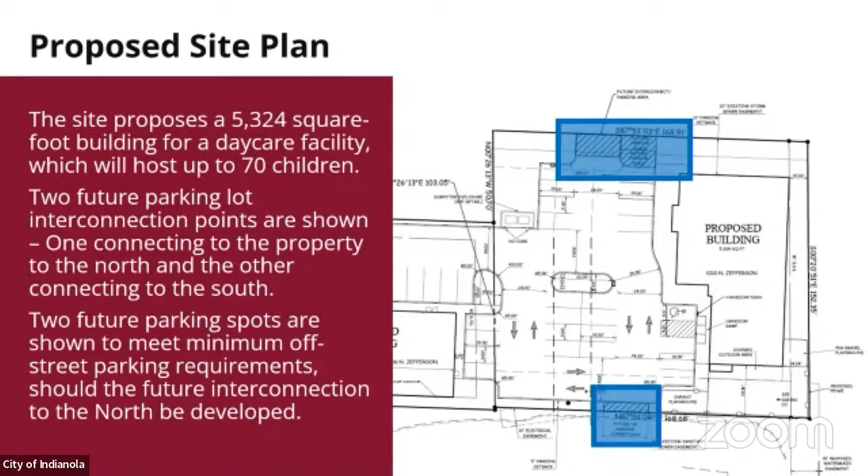There are 2 future parking spots that are shown, and those would be implemented should the lot to the north develop. There are also 2 proposed connection points shown between this parking lot and a future parking lot to the north and to the south. Should either of those develop, when the one to the north is developed and an access way is developed, that's when the parking lots would be created.

Staff is recommending at this time to move alternative 2, to approve the rezoning request with conditions. That condition is that, should the lot to the north develop, an interconnected parking lot must be implemented, and 2 additional parking spaces must be created to meet minimum off-street requirements.

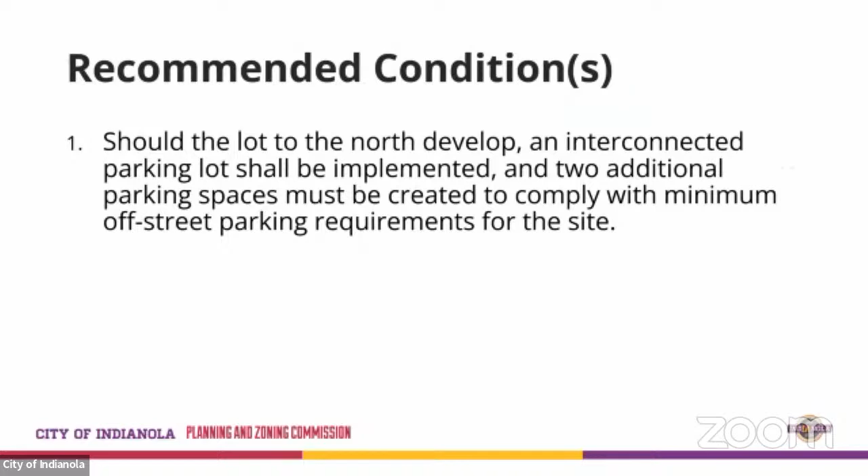Should this item receive a recommended decision, it will go on to city council for their final decision on January 17th. Any questions?

I have a quick question. So we're 2 spots short of the parking minimum. The interconnected parking lot going through that would meet the minimum requirement then? Is there any concern with that interconnectivity given the grade differential that's shown there? It looks like, just from the civil plan, that there's a little bit of a hill between the 2 sites. How do we account for that?

I can give you some background on why we went forward and were comfortable with this recommendation. So the property owner of this site, I don't know if fully purchased, but has at least under contract the property to the north. As we've worked through some of the preliminary things on that, one of the thoughts on that site to the north, which has that creek running through it, that drainage way right there, they're looking at options on putting a storm sewer through there and then filling that area in. We've talked preliminarily on a lot of those things, so as we move forward, I think we're comfortable to a point now through the discussions we've had. If that site develops to the north, that grade's probably going to be taken care of when that ditch fills in, if it does. So one of our plans going forward, obviously, will be that.

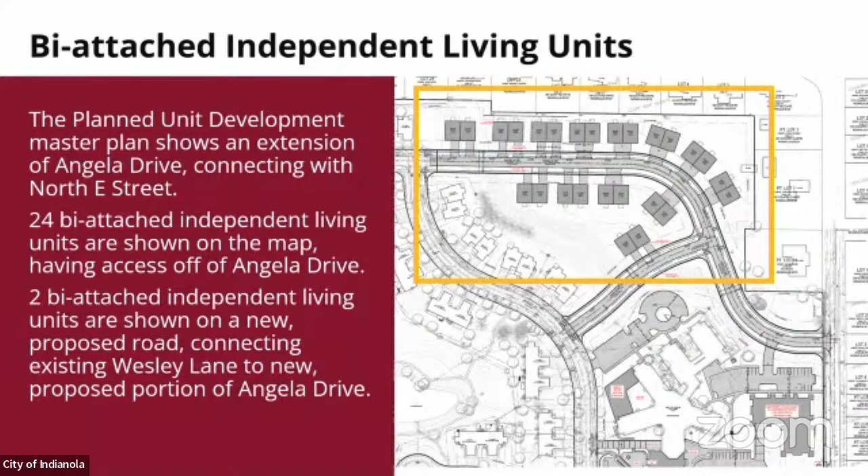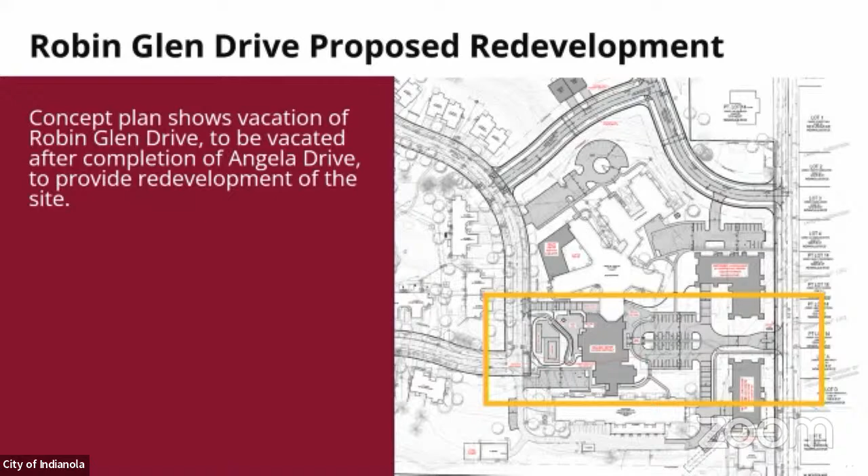They are showing an extension of Angela Drive, which would connect to North E Street, and along that drive would have 24 attached duplex units, which are highlighted on the map. 2 additional duplex units are shown off of a new proposed road, which connects between Wesley Lane to the new proposed portion of Angela Drive. The concept plan also shows a vacation of Robin Glen Drive to be vacated after the completion of Angela Drive, to provide for redevelopment.

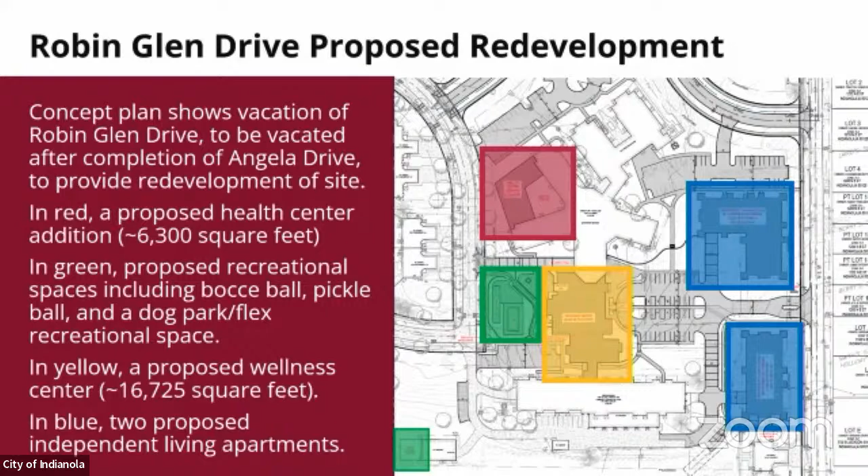The concept plan shows these new proposed additions within that area. In red is a proposed health center around 6,300 square feet. In green shows proposed recreational spaces, including bocce ball, pickleball, and a dog park / flex recreational space. In yellow is a proposed wellness center that is a little under 17,000 square feet. And in blue is 2 proposed independent living apartments.

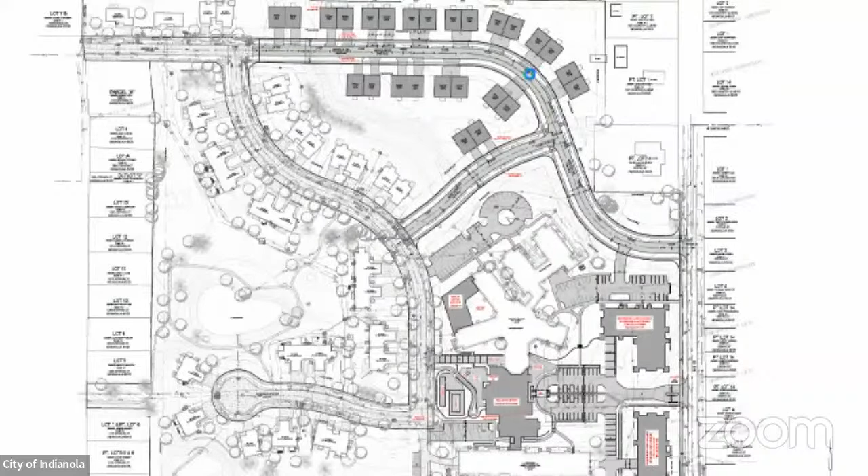We kind of got to keep it in order here, and I have a question for the engineer. I'm not trying to be rude and step on you guys, but for me, it's hard to keep track when there's 5 of you talking and my brain does not function very well for that.

So I wanted to ask about that, just specifically trying to keep some order here. What are the exact setbacks that you guys are proposing from the building, from the property line in your master plan right here? I think the rear was 20. 20. Okay, so 20-foot building setback. Per your ordinance, I think it's 30, correct? Yep. Well, so the PUD district doesn't have a specific setback.

That's where you propose your own set of bulk regulations on that. But when you look at our 2-family requirement with the code currently, if it was in a regular zoning district, it would be 30, yes. In other words, how far could the deck go back, or is that the building itself? The building. So then the deck can encroach into that setback up to 20 feet.

Yeah, so that leaves... I guess my question is, why would you as a commission approve that? The proposal to the commission, no one's voted on anything. Right, that's why we're here to hear your point of view as well. So we're diametrically opposed. Thank you.

My name's Kimberly Leifson, I'm right next door at 1213. I had a question since they're removing all the entryways and routing everything through Angela Drive now. If that's where all the deliveries, ambulances, and trash service are going to be directed through the neighborhood instead of the main entrance like before, that's a concern for noise and pollution with big delivery trucks coming and going all hours of the day. So that's my main question.

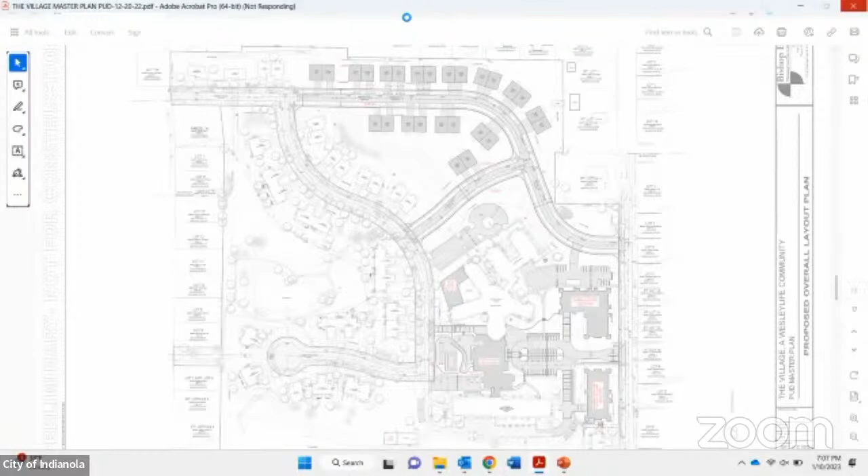I feel you. So Ward Phillips, I represent WesleyLife, the owner of this project. Our office is in Johnston, that's where I office out of, and this master plan is a long time coming. This is something our residents, both current and future, have been heavily involved with. When you're talking about setbacks, I hear you, absolutely, because we have like-minded seniors. There's really high demand to be on our property, to have a townhome product like this, with priority access to a continuum of care. That's a true not-for-profit model.

We're going to do everything we can to get that setback as far back as we can. We certainly hear your landscaping concerns and don't want to be a bother with deliveries, and we'll take that into full consideration and want to communicate with you. I think you've talked to our construction manager, Mike Schmitz, a little bit, but we'll have more communications on that.

So just to reiterate, we want to be a friendly neighbor. We want to hear all this feedback, we take it to heart. We build forever communities, and we expand on those forever communities as a not-for-profit in senior living. It's a neat deal that the village is a community to us that's unique, in the sense that half of the residents we have at the village are from outside of the Indianola zip code. We're bringing all these seniors into this great community, and they're attracted to it both for what we provide and what the city provides at large. So I just wanted to say a few things, thank you for the opportunity.

Next in line. Sorry, Susan Lathrop again. So as I just want to mention, as you're talking about tweaking the plan and bringing the back to 30 again, that when you look at this map as a whole and the neighborhood as a whole, all the existing village townhomes, again, like I mentioned, it's a park-like setting.

And to the north, those neighborhoods are like that too. They're pretty big yards, and that's why we bought there. But then you look at it and you have all this density. And I know you said you wanted to keep them close together. But again, when you talk about runoff and cramming that many buildings, you change the aesthetics of the whole thing.

We enjoy walking through there now because it is like a park. But when you put homes that close together, I think you should reconsider that, because it's going to be surrounded by homes that have more yard and more room to see between from one neighbor to another. So the way that's drawn, it's not going to be aesthetically in keeping with the way the village has been, or the neighborhood surrounding the village has been.

So City requirements, driveways and faces from the roads. We could strip this down and get those down. The city staff had some concerns about driveway locations, so there could be compromise there.

Thank you. Oh, and by the way, I never got a postcard, so my notice was zero.

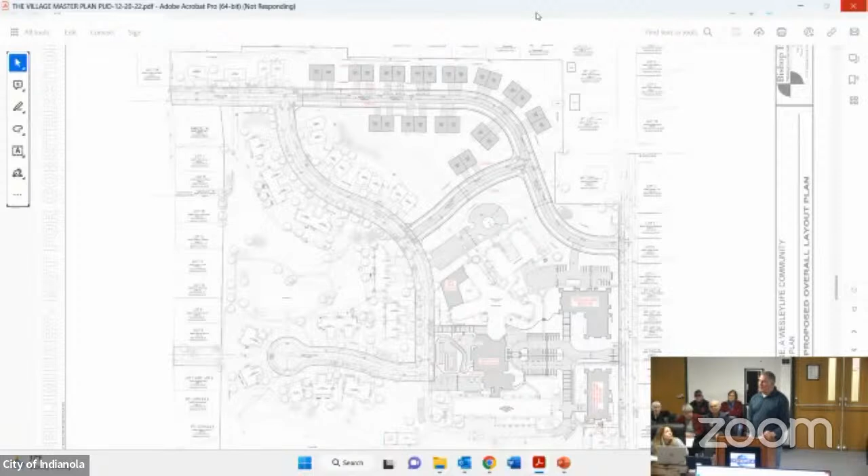So is that well ahead of time, publishing in a paper, or is that posting on a bulletin board here, posted at City Hall? Our website, on our agenda center, on our website, and we post them on bulletin boards within City Hall. Bulletin board in the city and the website. That's the only notice of the next P and Z meeting. Yes. And again, that's just for everybody's benefit, so that we don't have a notice issue again. I think that's the minimum that we can ask for. I appreciate it. Thank you.

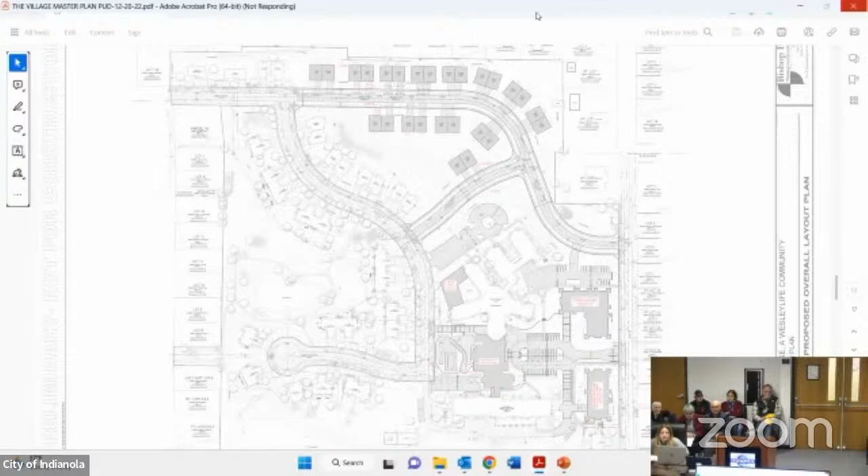Nurse, where would you like to go from here? I'm ready to make a motion. Excuse me, somebody's talking. Jeremy, go ahead. Yeah, I was gonna say, if unless we want to discuss more, but I'm ready to make a motion.

I'll make a motion, city planning zoning remand and request back to the applicant and our staff for further review and modifications. Namely, we talked about a few of these things. We talked about the 30-foot setback. We talked about additional information on buffer landscaping requirements, the northern portion of property, looking at that as potentially single story.

So those are a few of the things we talked about. I don't know if we want to add those things in there, but those are what I'm going to be looking for on the next thing. So again, I would go to alternative 4. It's not important that we be extremely specific if it's going back to the next meeting.

So back to that with the intention that it comes forward at the January 24th meeting. I'm correct on that date, right? That's my question too, just for the sake of clarity for everyone here. The plan is that the next meeting, the 24th, if this motion passes, it would be at that meeting. The engineers are okay with that.

So it's the motion, not so much us, I think it's whether or not we- I hear you, I hear you. We're together, I hear you. I get you. Oh, I'm sorry, you're talking. Yep, we apologize, doing good.

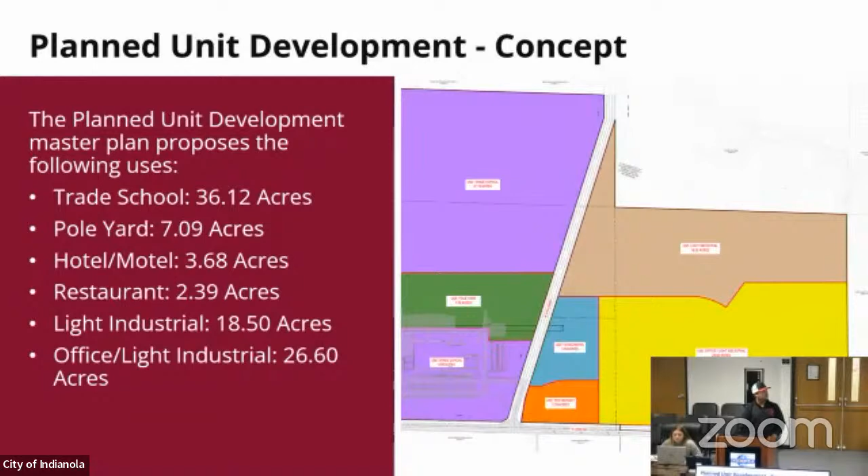This is obviously in our industrial park. We want to make sure we grow our industrial park. There's a lot of land owned by one property owner out here, so let's lock it in, let's see the plan, let's show it.

We could have just gone with, okay, let's rezone these sites here, the hotel and the restaurant site, we'll rezone it C2, bring the commercial in. My only issue with that is then we start seeing a map with colors on it and stuff like that. I think this works cleaner.

PUDs technically, in my opinion, just from a planning perspective, always work a little bit cleaner. You'll see a lot of cities do many more than we ever do here so far. Maybe we'll do more in the future, but they work. I think this is a perfect example of doing a commercial/industrial PUD and how it can work.

Because you've got the existing school—Robbie said the restaurant and the hotel are really only there because of the school. So you're seeing all of these uses coming in that are working off the main trade school. Long-winded answer, I know.

The only other thing I wanted to note, and I know it was in the packet, is Missouri Valley's done their due diligence on the hotel. There's a market study that was done to show—because that was our biggest concern from the start—and I didn't even need to tell Robbie to do this, he did it on his own. But that would have been my main concern too: can the city actually consume another hotel, and make sure the other ones are okay?

According to the study, we do have the ability to have an additional hotel in town. It really ties into Missouri Valley utilizing it during the week mainly, and then it's open for the weekends to the public for festivals and different events that are going to draw people to Indianola, which was kind of nice.

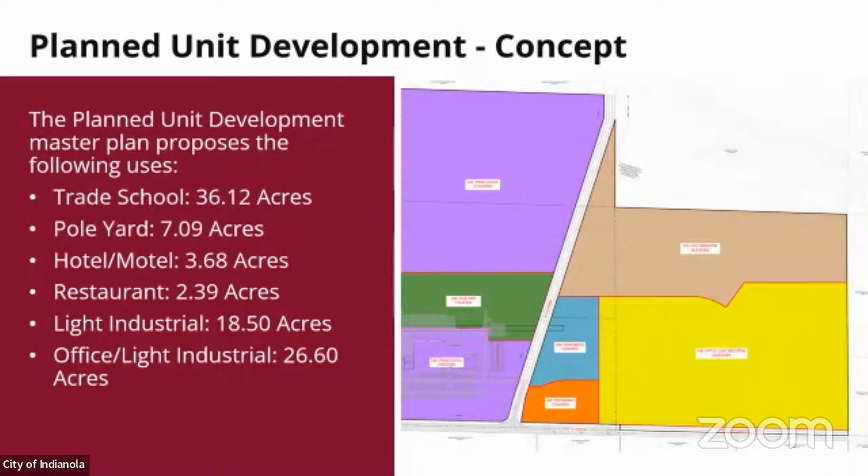Hornsby, yes. Weagle, yes. Goldwich, yes. Ritchie, yes. Harris, yes. Becker. Harmon, yes. Right, yes. Thank you so much. Thank you, guys. Appreciate it.

Thank you. All right, next item. Consider waiving right to review of a plat of survey for Chad Daniels for a property located within 2 miles of the city of Indianola.

This could be the Gladson one. I can't pull it up on my computer because my Adobe isn't working anymore. This is a plat of survey request to do a boundary line adjustment for the Gladsons. They're not creating any new parcels, just adjusting boundaries. This one is located outside of our growth area, so staff is recommending waiving the city's subdivision authority on this one.